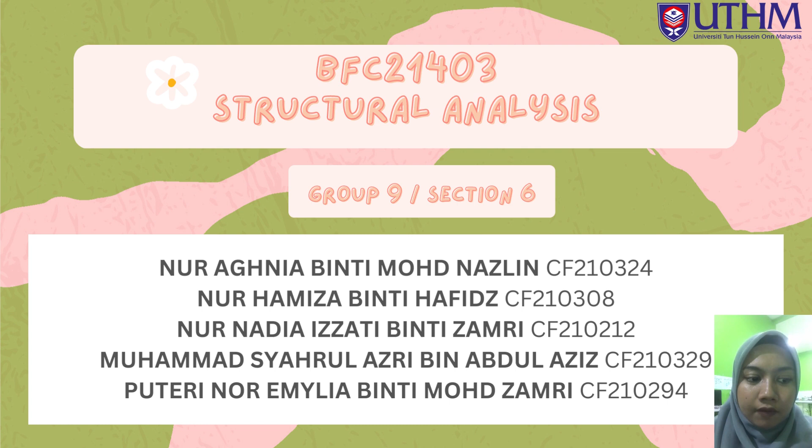And today, me and my friend would like to present about our project, which is the title of the project is Truss Bridge. So we are from group 9 in section 6.

For the executive summary, the project was managed by us, and we have to design the bridge and the truss bridge, and the bridge should be static or non-static. Then we have to use the application, which is the STAAD Pro or the LinPro software. So the software provides the data for each calculation. So the software as well as the understanding in the class should be related to comparing the data manually.

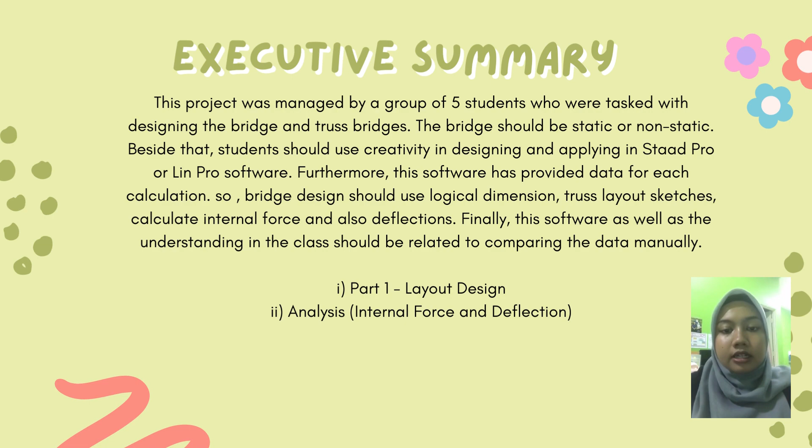So we have two points. The first one is part 1. We have to lay out the design that we choose. The second one is analysis. So we have to analyze the internal force and the deflection of the design that we choose.

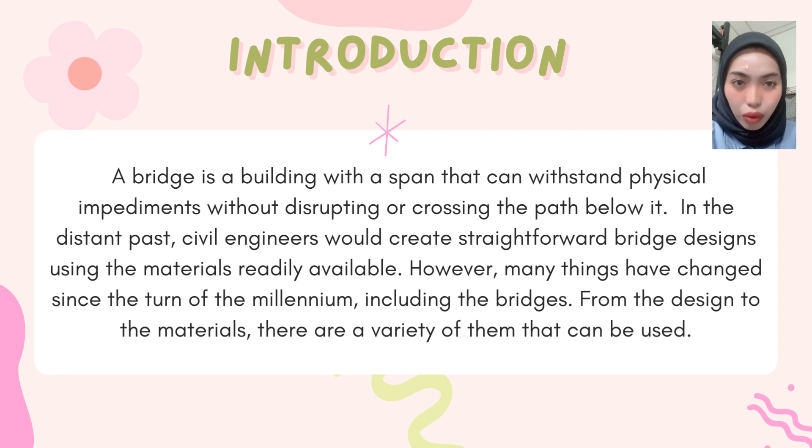CF210294. First, I will present about the introduction. A bridge is a building with a span that can withstand a physical impediment without disrupting or crossing the path below it. In the distant past, civil engineers would create straightforward bridge designs using the material that was available. However, many things have changed since the turn of the millennium, including the bridge. From the design to the material, there are a variety of them that can be used.

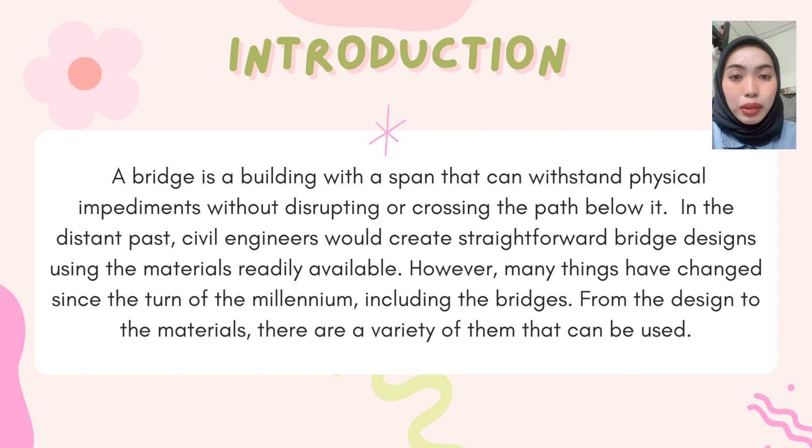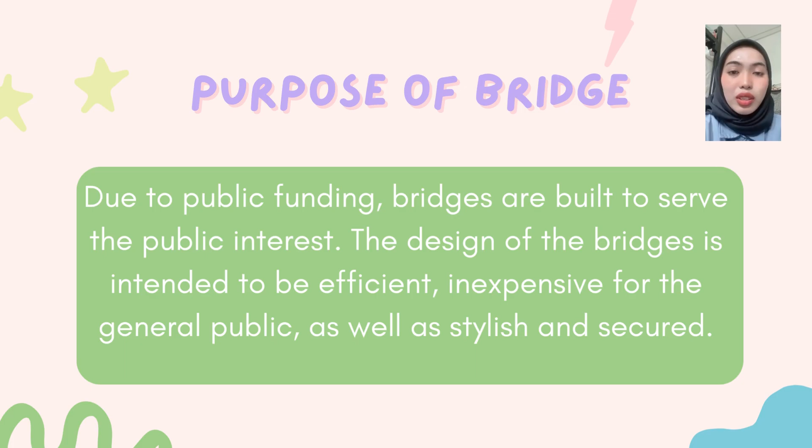Assalamualaikum and a very good evening to Dr. Hafiza. I am Nur Nadia Izzati binti Zamri, CF210212, and I will present about the importance of bridges.

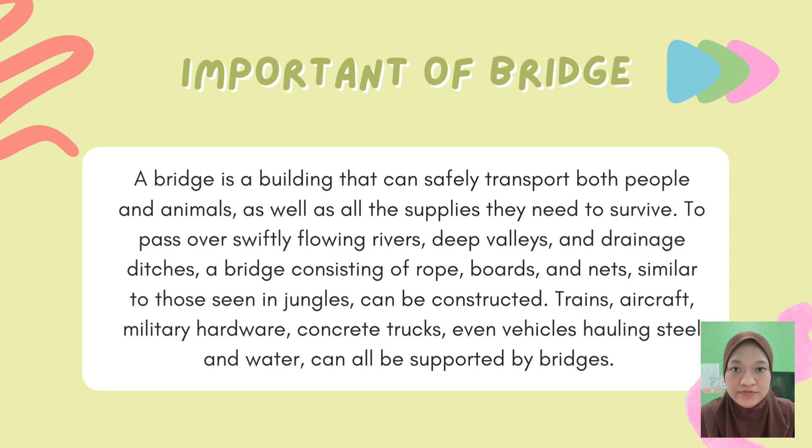Assalamualaikum warahmatullahi wabarakatuh. Hi, my name is Nur Aghnia binti Muhammad Nazlin and my metric number is CF210324. I would like to present about the types of bridge.

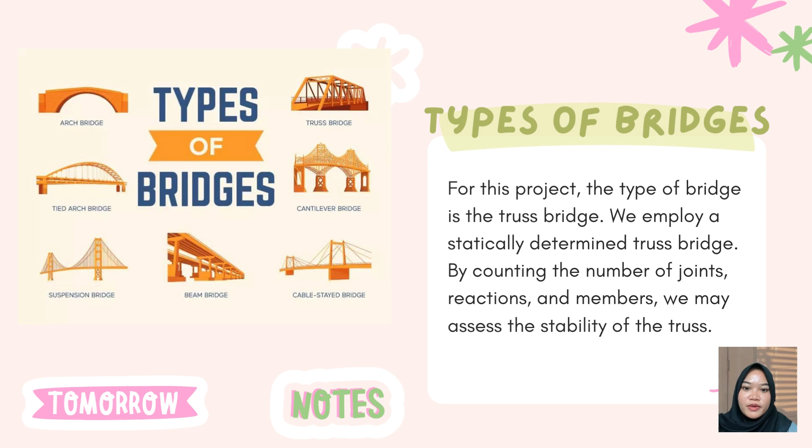There are several types of bridge such as the arch bridge, truss bridge, cantilever bridge, cable-stayed bridge, beam bridge, suspension bridge and tied arch bridge. For this project, the type of bridge is the truss bridge. We employ a statically determinate truss bridge. By counting the number of joints, reactions and members, we may assess the stability of the truss.

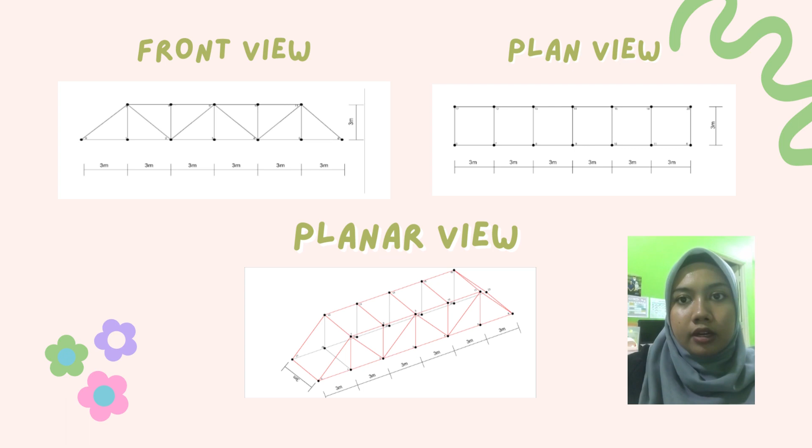For the layout of the bridge, we have three views, which are the front view, plan view and planar view. In the design of the bridge, for the left side, we put the pin support, and for the right side, we put the roller support. The design was inspired by the Warren Truss. The Warren Truss bridge was designed by James Warren in 1848, and it is the most popular bridge used in the world. This truss uses equilateral triangles, and equilateral triangles are used to reduce forces to compression and tension.

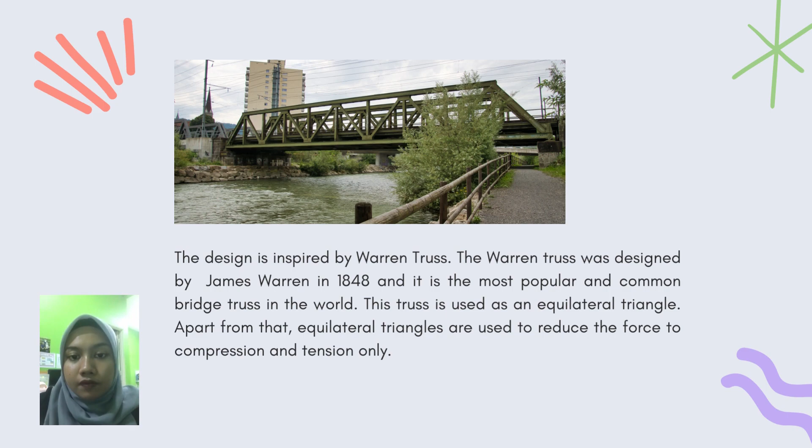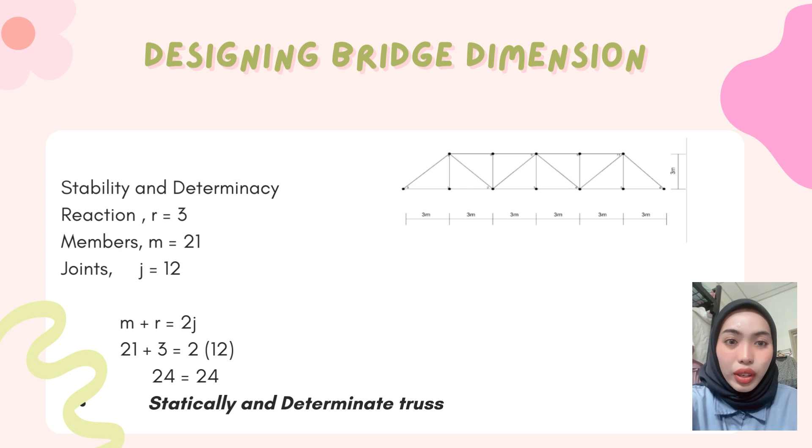For designing the bridge dimension, stability and determinacy, reactions are 3, members are 21, joints are 12. So the formula is M plus R equal to 2J, 21 plus 3 equal to 24, 24 equal to 24, so it is a statically determinate truss. Next, the bridge external forces of the truss. Based on this figure, there are two supports, which are the pin support on the left side and the roller support on the right side.

The load applied in this bridge is 125 kN, negative 250 kN, and 125 kN. The red arrow based on this figure is compression and tension. When it is far away from each other, it is a compression, while when it's getting together to each other, it is a tension.

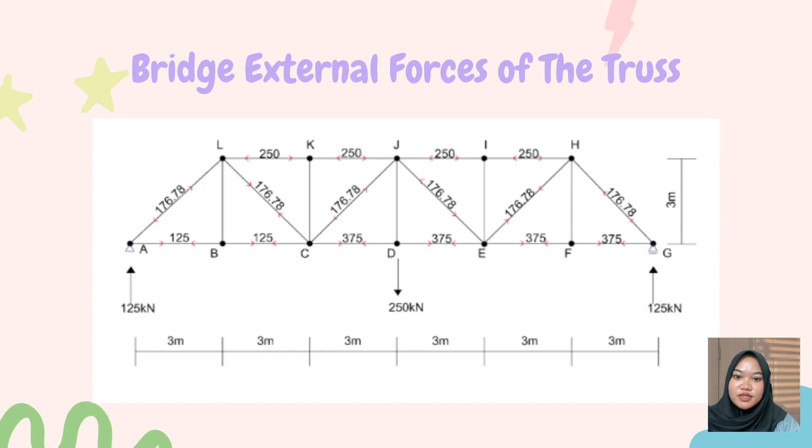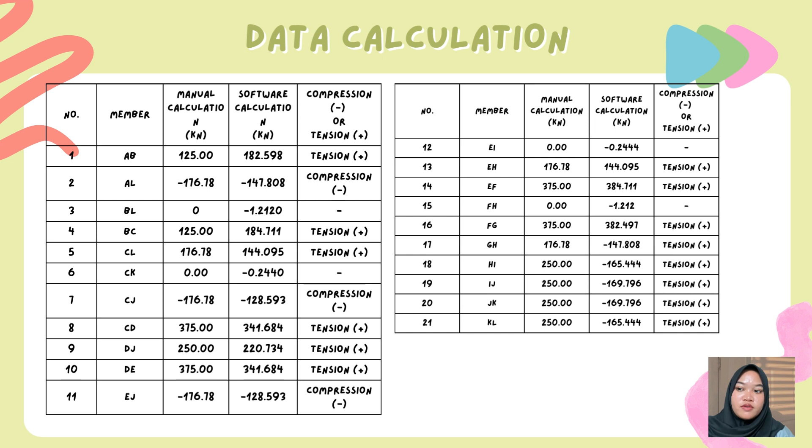Next is data calculation. There are 5 columns. Number 1 is the number. Number 2 is the member. Number 3 is the manual calculation. Number 4 is the software calculation. And number 5 is whether compression or tension.

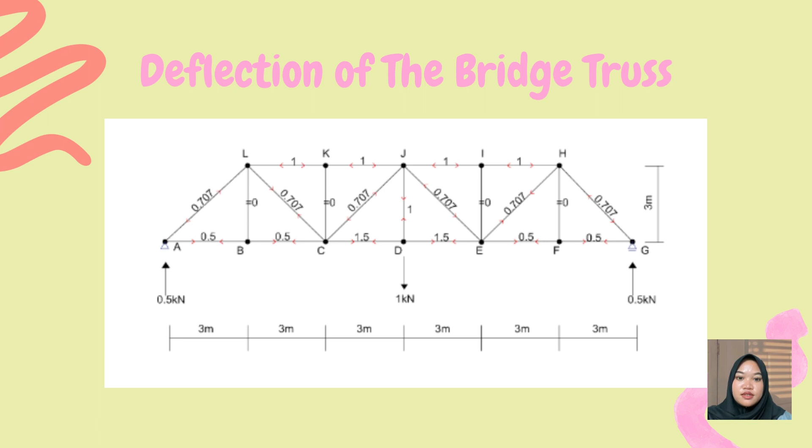Next is the deflection of the bridge truss. We applied the 1 kN in the middle of the truss, and this is the result that we got. And lastly, the data calculation for the deflection. There are 5 columns in this table, which is number 1 the number, number 2 the member, number 3 the manual calculation, number 4 the software calculation, and lastly the compression or tension.

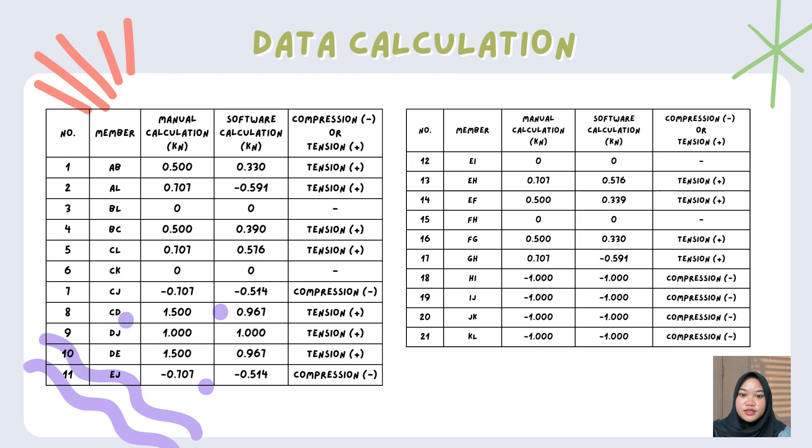Okay, now I want to present about the value of vertical displacement after we calculate the internal forces and also the deflection, and we use the table to calculate the vertical displacement at point D, which is we put the 1 kN at point D, replacing the 250 kN. So the E used in this project is 220 kN per meter, and our area is 10 meter. So our vertical displacement at D, we got 13.127 meter. So the next slide is the calculation for this vertical displacement.

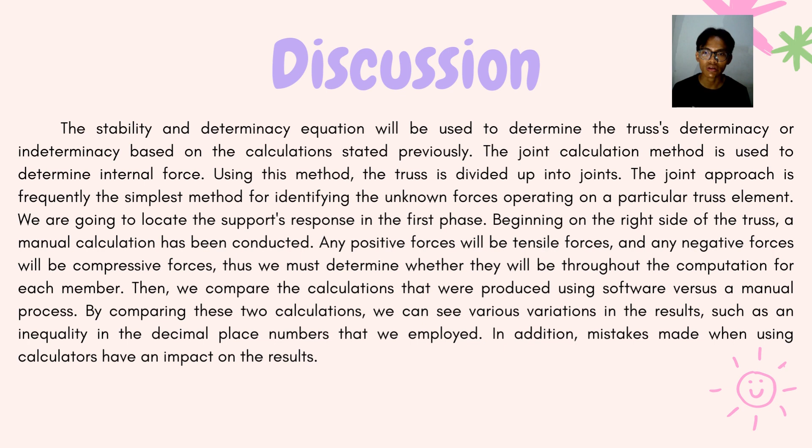Then we compare the calculation that we produce using software versus a manual process. By comparing these two calculations, we can see various variations in the results, such as an inequality in the decimal place number that we employ. In addition, mistakes made when using calculators have an impact on the result.

Next, I'm going to continue with the conclusion. Once this project was finished, we were able to learn new skills for creating our own bridge layout. In addition, we may put the theory we've learned in class into practice. We also discovered that a bridge design greatly affects the structure's stability and strength. We are all aware of the significant role that bridges play in our everyday life since they are necessary for the development of cities and the transportation of people.

We also came to the realization that understanding the difficulties is one of the crucial aspects in the design process. Otherwise, all of your hard work in designing can be for nothing if the engineering design team for a bridge does not comprehend the objective of the bridge. Its design may not be at all necessary to address the issues. Before taking any action, the design team must first have a complete understanding of the primary issues in order to ensure that the solution is appropriate, effective, and inexpensive.